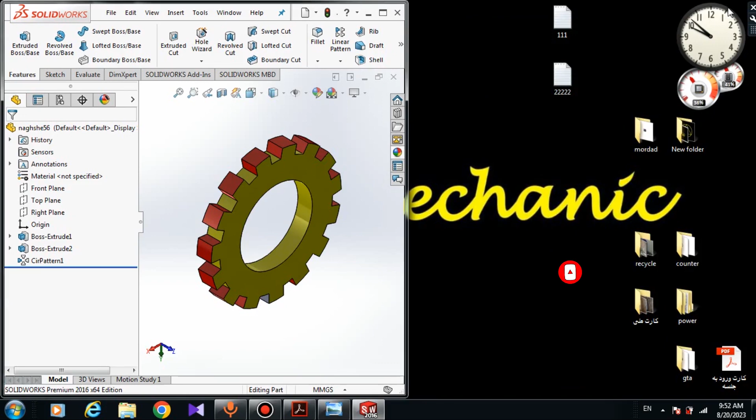Here we have the dimensions. First you have to close the model. For closing the model, just come here and click on close. Now you have to make a new part. For making a new part, come to new part. Okay, now we have a new part.

First things first, we have to choose a plane. At first it doesn't matter which plane you choose, but I suggest you choose the front plane. So click on front plane and click on the sketch. Now we have an open sketch. You can see the sketch is open. We have to draw 3 circles inside each other.

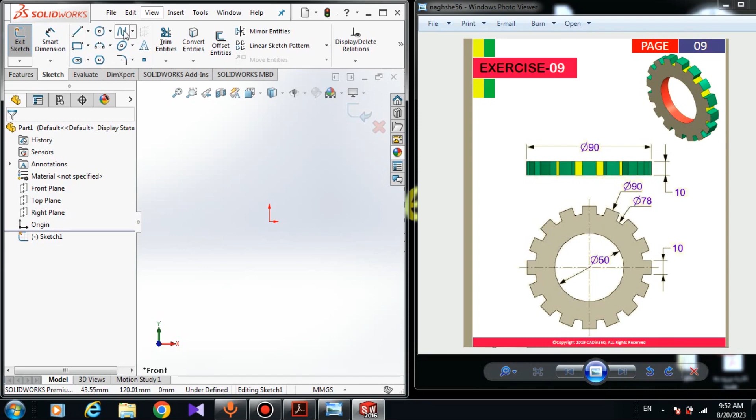So here choose a 2-point circle, and here draw a circle. And you can see as you get close to the origin point, the orange point here appears. It means that if I click on this point, the center of the circle will be connected to the origin point. So click on the screen and now draw 2 other circles. And right click, select to exit the tool.

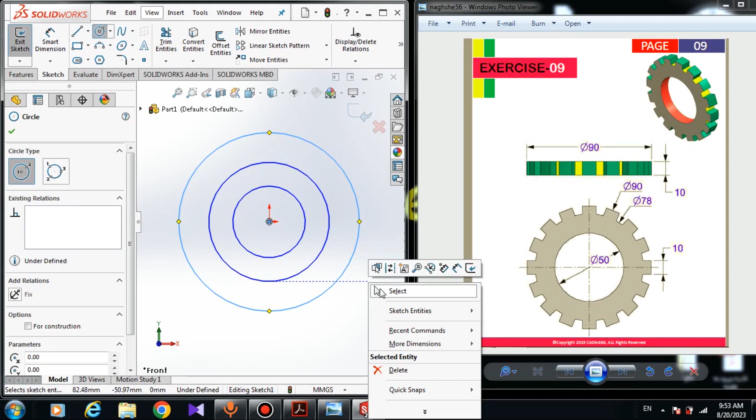Here choose a smart dimension. The dimension of the inner circle is 50 millimeter, and the dimension of this one is 78 millimeter, and the dimension of the last circle is 90 millimeter. And yes, now we have to draw 2 center lines.

So here choose the center line and connect this point to this point by a center line, and right click, select to exit the tool. Now choose the center line again and do the same thing here. Connect this point to this point and right click and select.

Now choose the line and draw a vertical line. So start drawing a line from the bigger circle and connect this circle to this circle, and be careful, the line must be vertical. So you can see as I move the line, a yellow symbol here appears, the vertical relation, and connect it to the smaller circle, and right click and select.

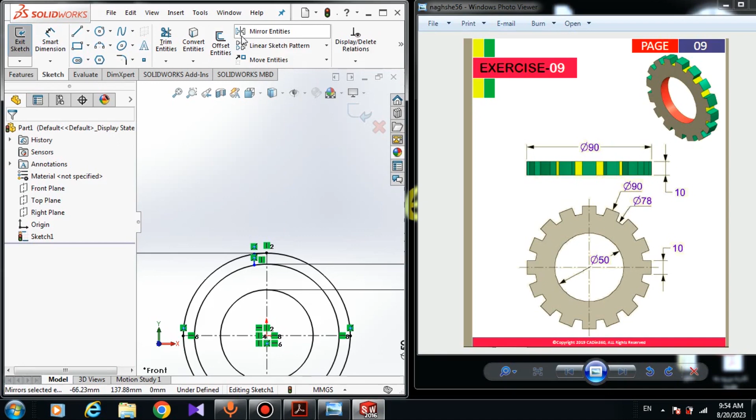If you can't see the dimensions or the relations, come to hide and show items and you can turn on or turn off the sketch view relations or the dimensions. Now here choose mirror entities. I'm going to mirror this line to this side of the center line. So here choose this line in entities to mirror, and in mirror about choose the center line and click on OK. Now choose the smart dimension. The dimension from this point to the point here is 10 millimeter.

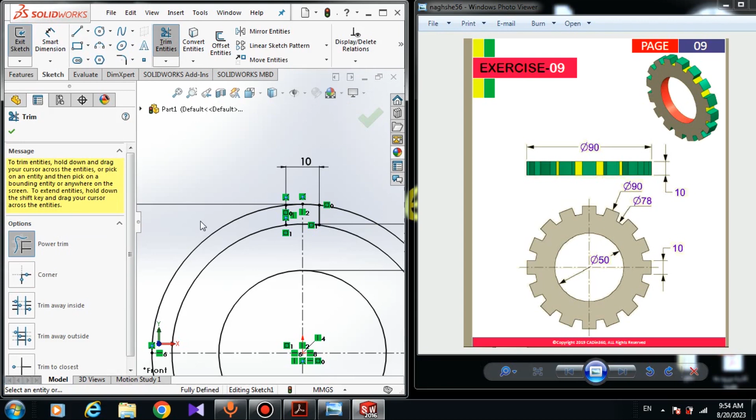Now all we have to do is just trim the extra parts. So here choose trim entities, power trim, and trim these parts here, and this part, and this one, and this one. Yes, and okay. But our sketch is still not fully defined because the dimension of the bigger circle has been deleted. So here choose a smart dimension. The radius of this arc is 45 millimeter. Yes, and okay, the sketch is fully defined and I can't move my sketch and everything is black.

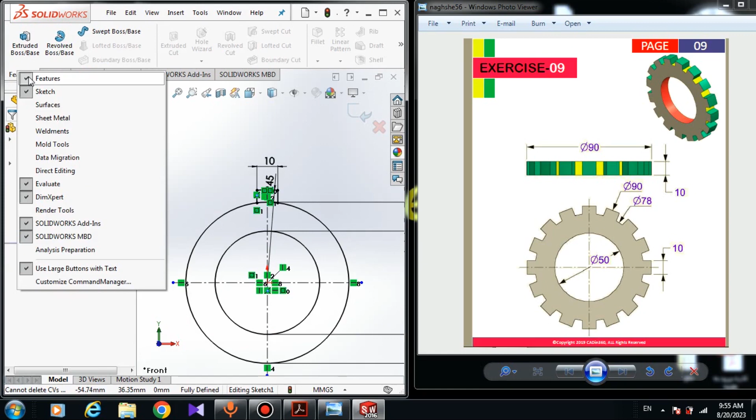Now come to the feature tab. If you don't have the feature tab, right click and you can turn on or turn off the feature tab. And here click on extruded boss/base. Here is selected contours. Click on this region. Don't choose this region. We will extrude this region after this extrusion.

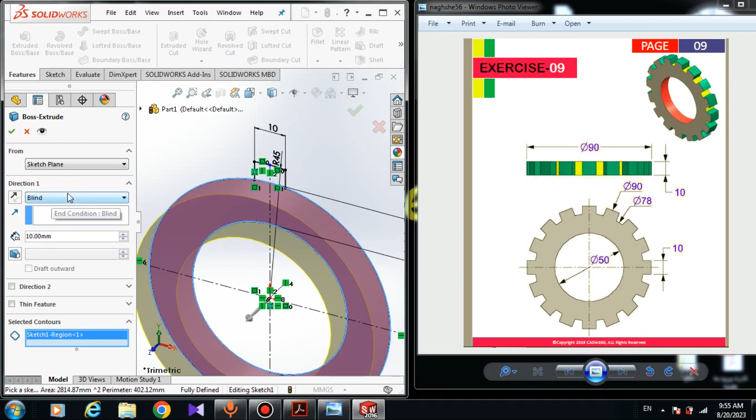Here must be 10 millimeter. We have to extrude the sketch about 10 millimeter. Here must be blind and sketch plane. And click on OK. Now we have to extrude the sketch again. So here choose this symbol, and here choose the sketch.

Now again choose the extruded boss/base. I'm going to use the previous sketch, and now choose this region and the 10 millimeter, and please be careful, turn on the merge result, sketch plane, and yes, okay.

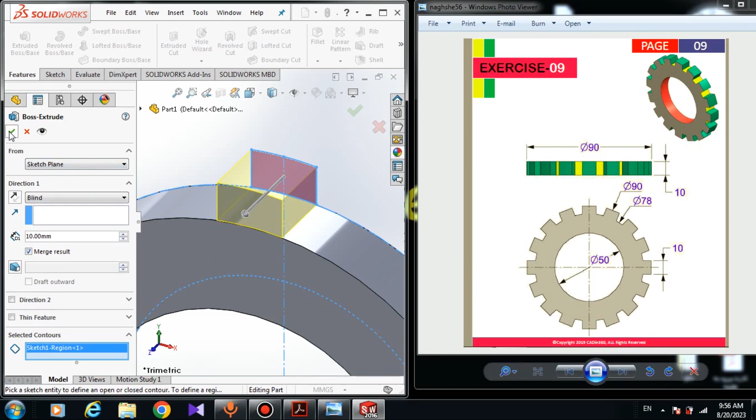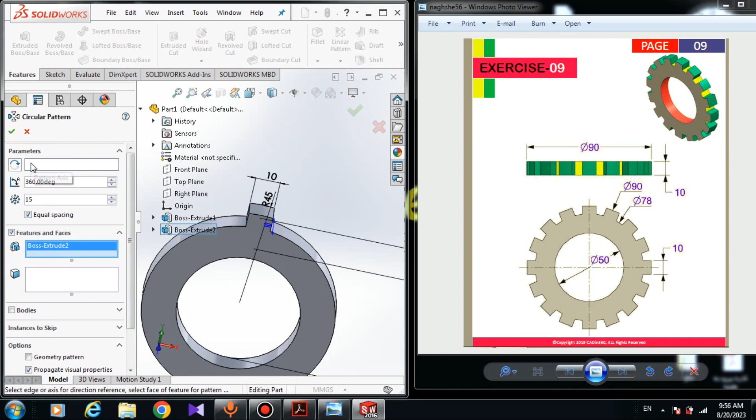Now we have to use the circular pattern to pattern the teeth. So here choose circular pattern, and in features and faces here choose the second extrusion, and in the first parameter choose this edge. And now we have to pattern these teeth about 15 times.

The number of the patterns, yes, there are 15 teeth on this surface, and okay. And we designed the model. Now all we have to do is just apply color, choose this boss extrude, and here in edit appearance I'm going to apply the red color.

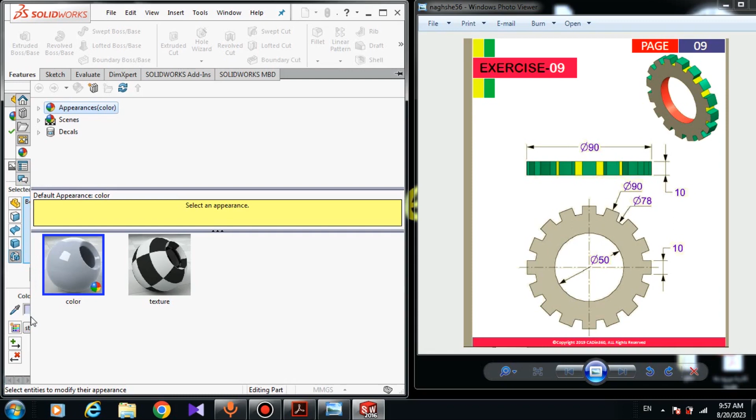I think red is much better, so let me see, move this page. It's really annoying sometimes. Yes, I'm going to apply the color. The color should be, I think, green is not okay. Green is okay.

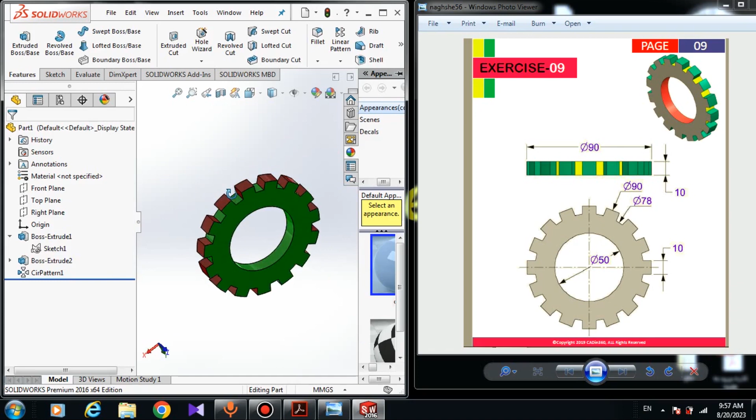And the teeth here, choose the circular pattern and choose this one. And here in edit appearance, I'm going to change the color to red. Red is okay. And that's it. And we designed the model. Please practice at home and do it yourself. And it's very, very important to practice at home.